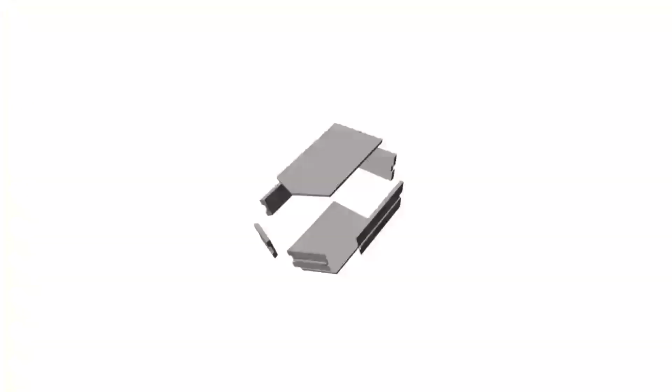When we link principles and theory to art and practice, that's when science becomes meaningful. What is so special about this project is that it's somehow in between arts, science, and engineering. So the question is, if glass is a material that is going to be constantly used in the field of design and architecture, do we know how to come up with better structures made out of glass, and how to take advantage of the structural capacity of the material itself?

We really want the glass to do everything, from the load bearing to the aesthetics to the construction techniques. Glass Bridge is a manifestation of a narrative that architecture could create elegant, efficient structures, although they might look daunting and impossible at first glance. These sorts of structures follow the rules of nature. When you look at the skeleton of animals, when you look at a tree, everywhere you can see these tension-compression systems that efficiently distribute the material where exactly it's needed.

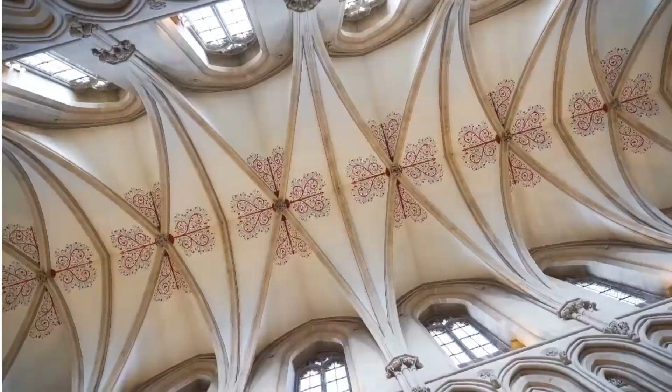We're doing actually what has been used by engineers and architects since medieval times, and probably earlier than that. What's unique about what we're doing, I think, is the material that we're using, but also the modular approach that really lends a degree of flexibility in your ability to construct.

We're used to thinking about glass as being a really fragile material, and one of the things that this project does is disrupt that narrative. Glass is the only transparent material with such durability that we use it everywhere, from facades to cars, to the screen we're talking through.

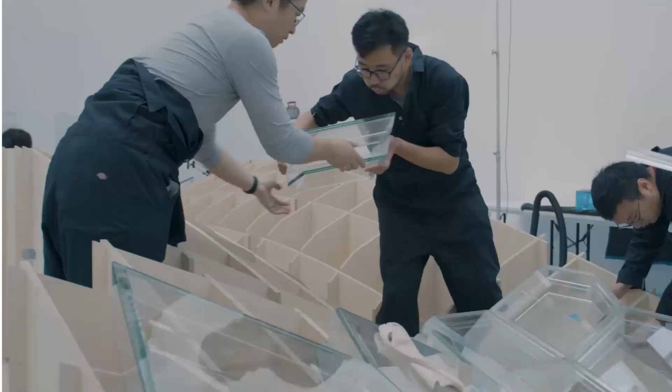We wanted to really push the construction methods related to glass. We wanted to show how you can be innovative with the use of material, how you can minimize the use of material without compromising the function. We also had intentions to create an elegant structure. We wanted to exercise all these techniques to show you can take advantage of existing technology in making pieces that are quite efficient.

The brilliance and success of this bridge is not only in its innovation, but in its beauty. This is just an example, a gate that opens all the opportunities for future architects and engineers who look at the conventional way of building structures and say, okay, as a second thought, we might approach this differently.

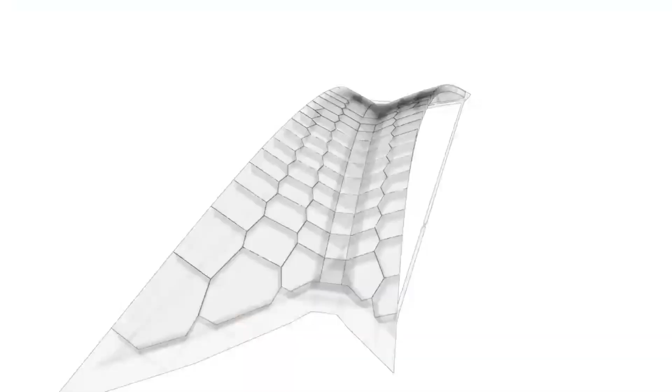My only hope is to open a door for future explorations, to look into innovative methods of construction that are more efficient, environmentally friendly, and reduce carbon footprint. We are trying to depict a better future for ourselves and also for the next generation to come.

If you don't know, this slide shows that the construction industry is responsible for almost 50% of annual carbon emissions. This includes embodied carbon and operational carbon. Embodied carbon is the amount of material, process, energy, and carbon that goes into the production of construction material together with the techniques we use to build buildings. This stays with every building we build throughout its life—you cannot change it.

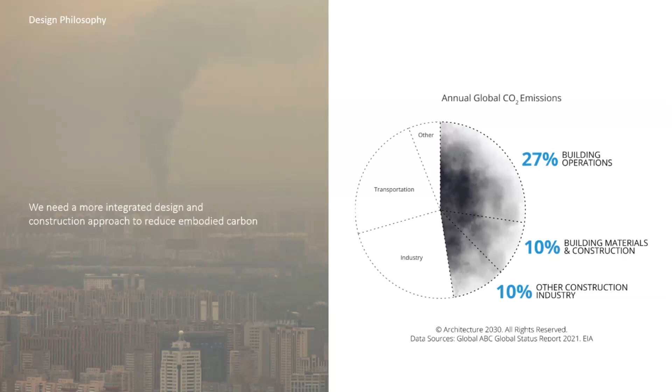Operational energy is another thing—you can invent new HVAC methods, improve or change that system. But one thing that stays with the building is the material and method of construction. So how can we reduce that footprint by looking into that method? Myself and my team, for the past 20 years, have been trying to come up with novel ways to help reduce construction material.

The inspiration obviously comes from nature. Many of you have seen this image before. Nature is a master at finding ways to redistribute material where it has to be, to create lightweight structures that function really well, through millions of years of evolution.

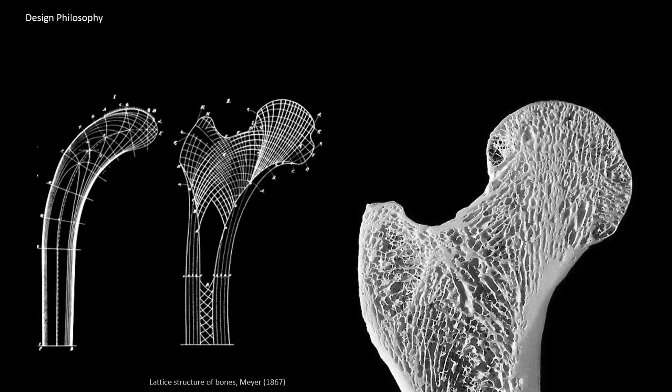Why is this so interesting? He said that if you hang a chain from two ends, it forms a spatial geometry. What's special about that geometry is that it's in pure tension—everywhere you cut a section through that chain, it's in pure tension. So there's no bending moment, no twist, anything. The material actually follows the direction of the force.

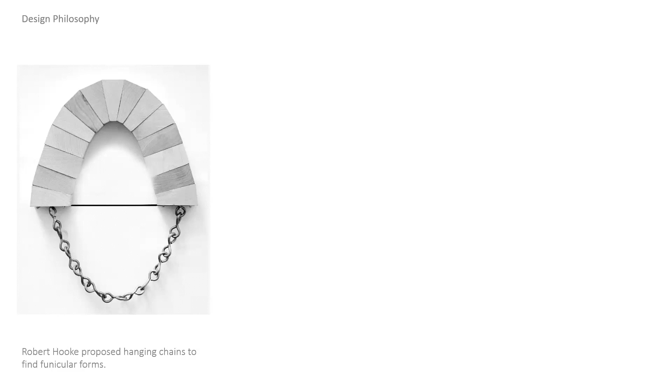More interestingly, if you reverse that form, it gives you pure compression. That's really interesting because at the time—for the past 100 years or so—people used to work with masonry material only, and that's the only force masonry can take. So they had to follow these rules. This became a design methodology historically.

200 years later, mathematicians looked at these forms we refer to as funicular or catenary forms. Funicular means the form carries forces in pure tension or pure compression. They realized you can geometrically describe these properties by creating a closed polygon around every node, and if you measure the length of each edge of that polygon, it tells you how much force goes into that node to keep the structure in equilibrium.

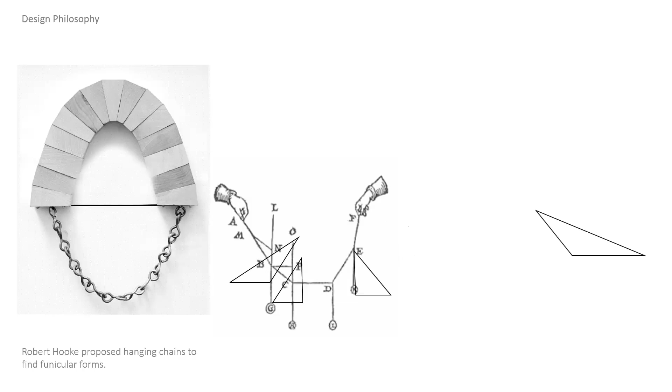This is super interesting because coming up with a form that is efficient and funicular is difficult. But we know you can design a force diagram that represents the equilibrium of that form, and from that force you can extract the form that is in either pure compression or pure tension. Everything is just pure geometry—you don't have to do any calculation, it's just pen and pencil.

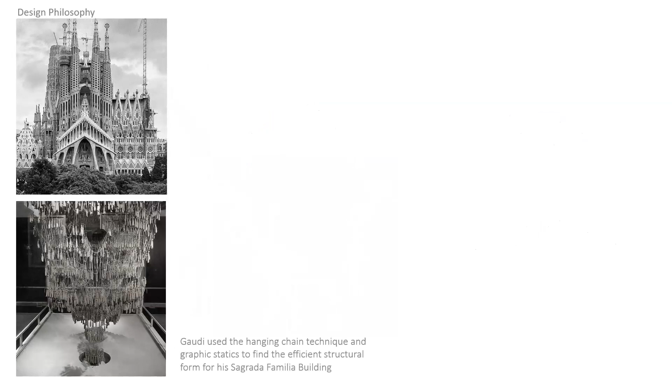So this method was used extensively in the past. If you're familiar with Antoni Gaudí, he used both hanging chain models for creating Sagrada Familia and graphic statics, which is the basis of this geometry-based method that I described.

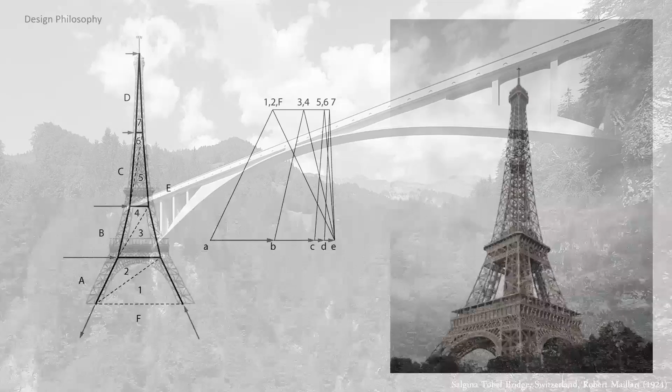Furthermore, the examples of great Swiss bridge engineers, Robert Maillart. He used graphic statics, a geometry-based structural design method, to build his structures. And for your information, the Eiffel Tower has been designed using the same methodology.

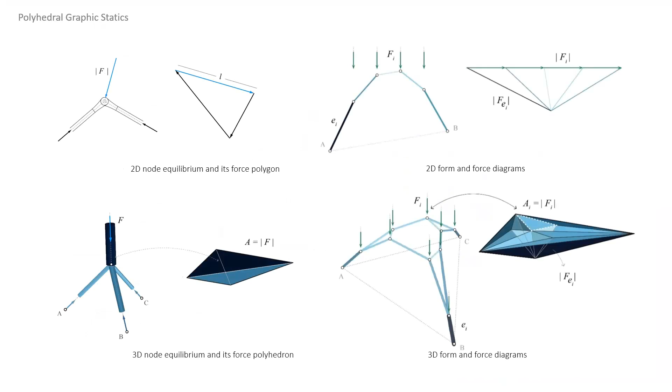In 2016, I was lucky to be among the people to extend this method after 150 years from 2-dimension to 3-dimension, where the equilibrium of forces could be represented by a closed polyhedron instead of a closed polygon. You measure the areas of the faces of those polyhedrons, and that tells you how much force goes into them. More importantly, you can design your force diagram as an aggregation of these solids together that describes the force equilibrium, and extract a variety of different spatial structural forms that are efficient, either in tension or compression. We've tested this with many examples in my lab.

For instance, this sample is only 24 pounds, and it can take the load of 4 elephants, 55,000 pounds. Or we design structures that are pure compression in the body, and the relative density is actually very close to the relative density of a human bone, the mass that is distributed in the space.

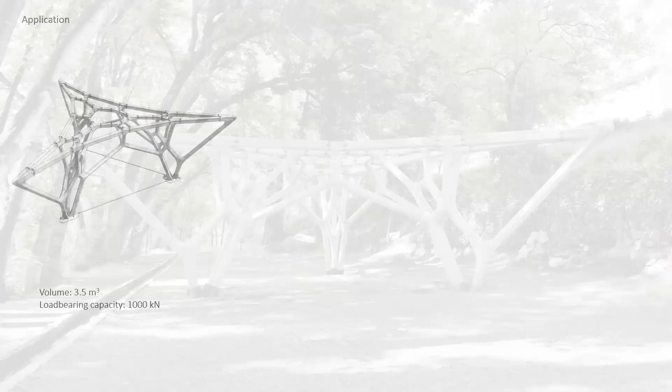We have applied this to a variety of different structures. For instance, this structure can take 10 times more load than a conventional post and beam with the same amount of material. And you can apply this to the design of floor systems, and you can reduce the material, for instance, from 30% to 50%. All good, great, but why glass?

All right, so quickly, why glass? We claim that we have a methodology that can design efficient structures. We can reduce the amount of material, we can reduce footprints.

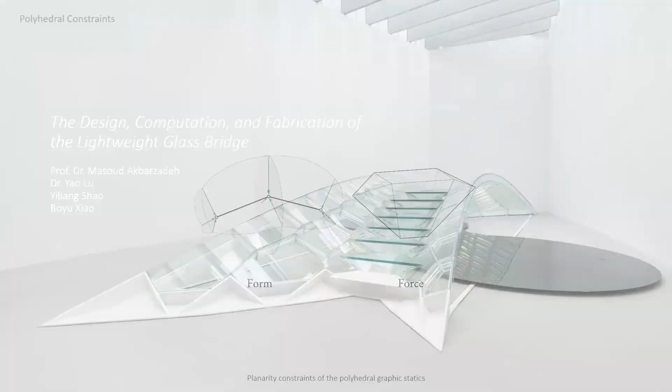Why glass? We all know that glass is actually one of the most important materials to work with, from the phone in your pocket to the envelope of buildings. And many designers and architects would start to use glass more because of its elegance. So the question was, if we claim that we can design efficient structures, can we design structures that are efficient out of the most brittle and challenging material to work with, which is glass?

For that reason, we picked that battle to say, okay, let's just design a super efficient, lightweight structure out of glass. There's another point for that.

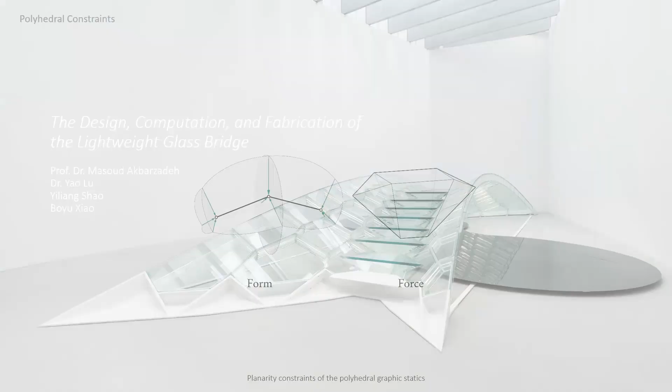The forms that I showed you have an inherent limitation. These polyhedral geometries all consist of planar faces. So on one hand, they're efficient, on the other hand, they're limiting. But this is not a limit in the field of architecture because we work with material. We have to materialize the forms that we create. So if they consist of planar faces, that means that they're best at translating sheet-based material into constructing efficient systems.

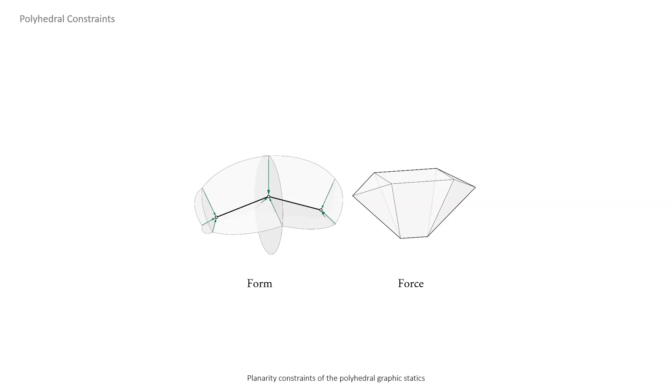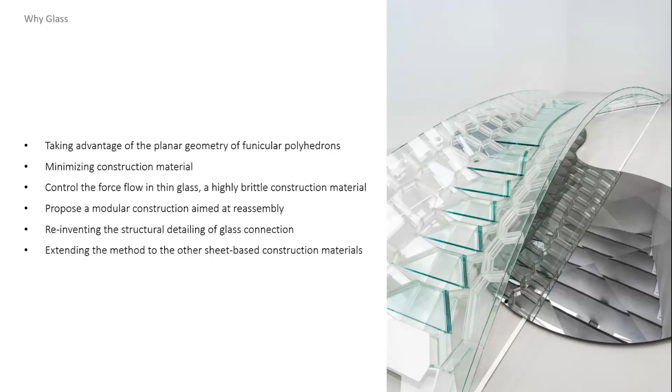So glass makes sense in this sense, because if we can build this out of glass, you can do this out of any other sheet-based material, like steel, aluminum, metal, concrete, etc. There is another design aspect to it.

Because we are using graphical methods, and we have full control over the geometry, we can redistribute the force in multiple load paths to get a multi-layer compression-dominant structure. This is very similar to the structure of, for instance, the backbone of a turtle.

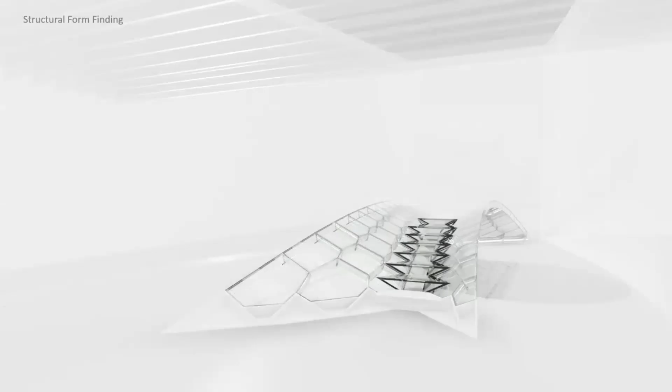Now, I'm going to tell you another thing that relates the structural form to the construction module of the bridge. So this is the bridge itself. You see that the module is a polyhedral form. It consists of 124 cells, polyhedral cells, that we take advantage of for construction later.

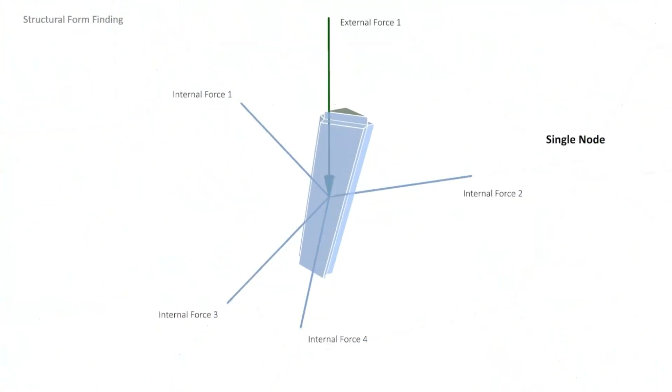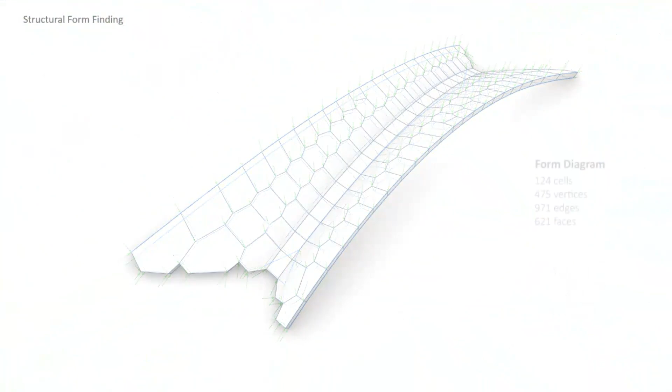If you look closely at that structural form that we designed using the methods of polyhedral graphic statics, you can see that the equilibrium of each node is represented by a closed polyhedron. These put together create a diagram that we call the force distribution diagram, from which this actual geometry of the bridge is extracted. Now, if you move further, we wanted to again take advantage of this geometry.

So we started to design the cells. Each unit is, in fact, one geometric polyhedron that consists of glass panels on the top and bottom, and the side face is made out of acrylic. The reason for acrylic is that it's cheaper at the moment. We didn't have that much time budget to go with glass, but in the future, obviously, we can do that.

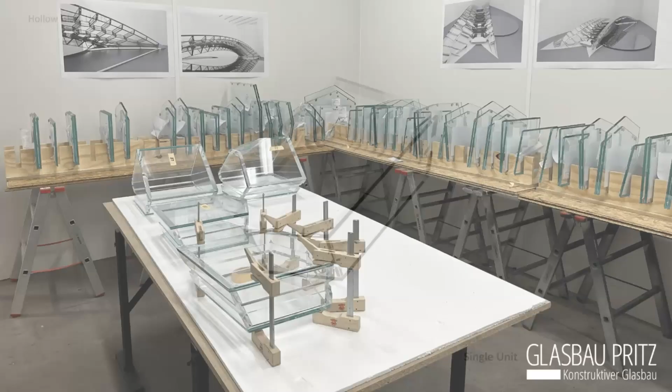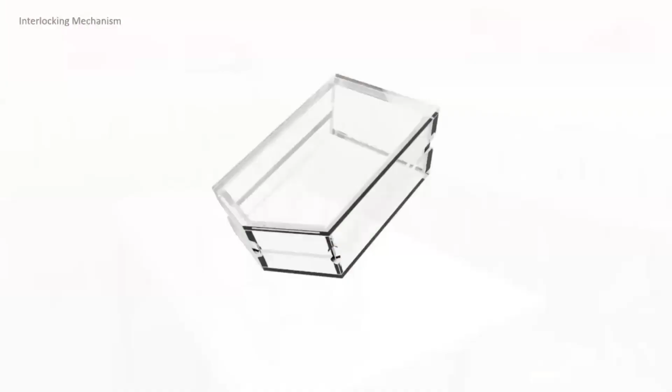So this is a scene where the glass units were produced in Germany, and we were lucky because Moritz from Glasbau Pritz is here tonight, so he can talk a little bit more into details. But we gave instructions to them on how to put it together because we did multiple studies on that, and then they translated it into precise construction.

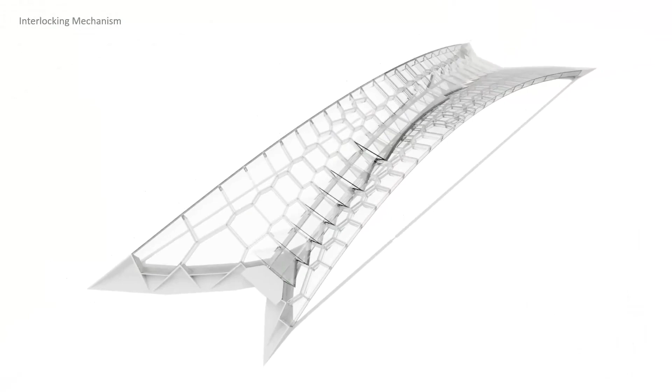Once you make this light-weighted structure, the most important thing is how you deal with asymmetric loading scenarios, because your structure is light and that might cause dislocations or displacement in the units. So we came up with an interesting mechanical detail that allows us to lock the units with each other. It's a dovetailing connection we refer to as a butterfly connection.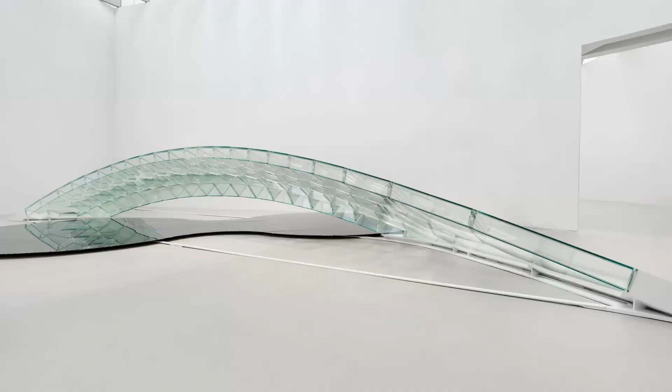That is the connection that held everything in place after we position the units. Everything is mechanical, so you can actually take that apart and disassemble it. If needed, you can replace the parts, and the goal is to disassemble it and assemble it in another place.

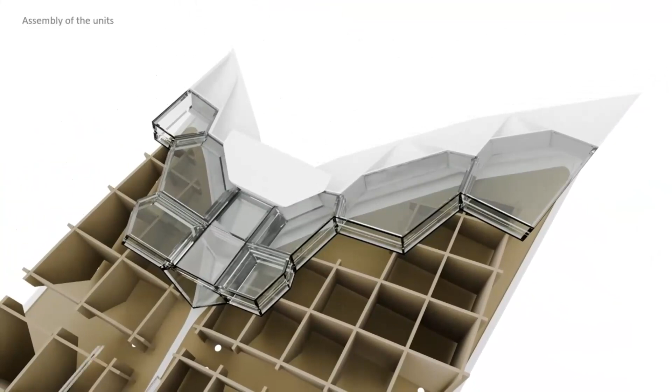The construction process started similar to many other structural systems. We start with the formwork, which is wooden, and then we place the units one after another. There is a particular sequence of assembly, because these butterfly connections could only be inserted in certain locations, so you cannot lock yourself in. There was a process.

We could not interlock all the units together because of the difficulty of assembly. In the places where we could not insert a butterfly connection, we used a square section rod for better engagement of the units.

The design of the bridge had rotational symmetry. These 124 units are in fact 62 identical units, and we basically start the construction from both ends, and they meet at the mid-span of the bridge. Then we have this keystone to place and connect the two ends together.

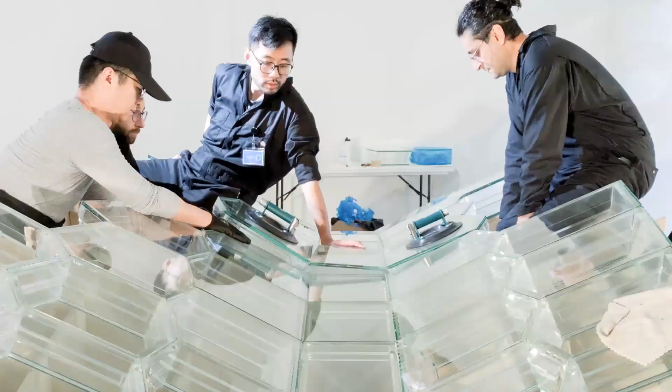It was not an easy task to assemble, because we had to make sure everything was precise, and the construction tolerance is only plus minus 0.1 millimeter. So we had to be very precise, and that was a little bit challenging. And this is the end piece.

What I showed and discussed was an overview of the reasoning and design philosophy behind it. But it took us around 5 years to get to this point where we could build this and exhibit it and talk about it. What I'm going to talk next, and invite my collaborators to the scene for, is to give you a little background on how we got there, because I did not talk about all the experimental studies we did to understand the material behavior, unit behavior, and structure behavior, or the material studies and numerical analysis needed to get to this point.

With this, I'll invite Dr. Joseph Yost to join me on the scene, and he can expand on the experimental work that he conducted, which allows us to rely on glass as a structural material. Thank you.

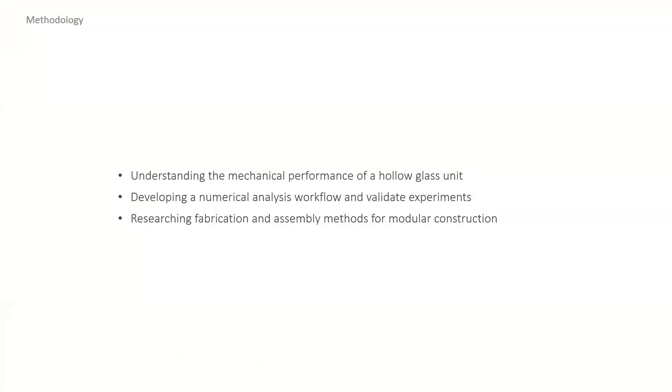My contribution to this evening is to show some of the background work that has taken place in the laboratory to justify the use of the material, which is glass, in the compression dominant form that we're using through the polyhedral graphic statics. Super important here is using the modular construction, okay? That's a very unique aspect of this project.

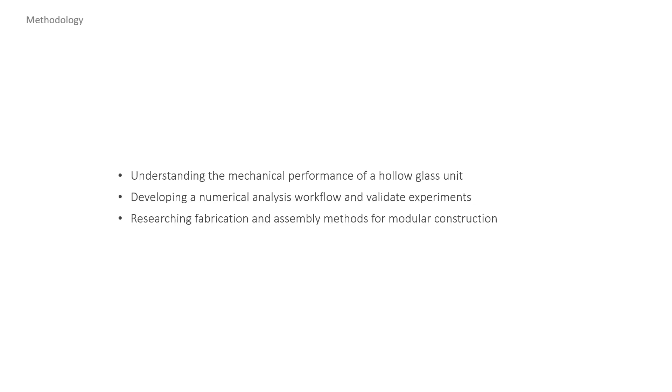I'm just going to look at a couple of pictures here, and those pictures are correlated strongly to the bridge that we have here at the Corning Museum and its ability to function efficiently as a structural system.

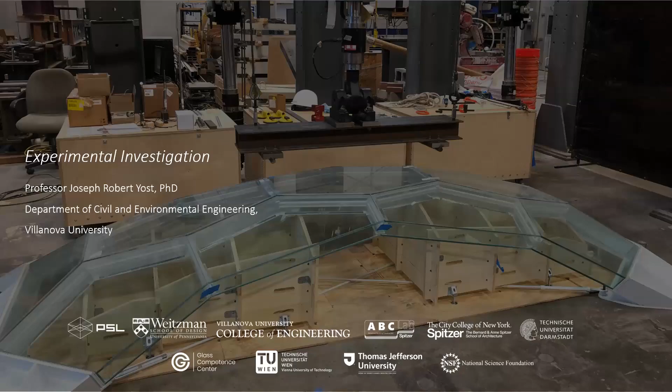I'm going to start off with the fundamental unit here, and that is the HGU, the hollow glass unit. Once we conceived of this as our building block, the first question we had to answer was, how strong is the building block? The system is only going to be as strong as its individual parts.

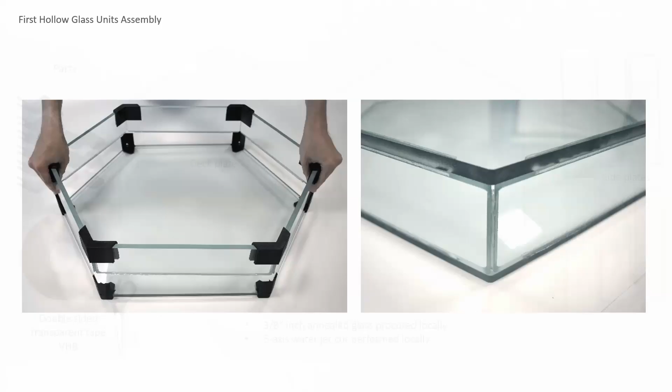So we built our first HGU in the structures lab at Villanova University, and this is from the fall of 2018. It's really amazing to look at this picture. We had the float glass cut by a local fabricator. We assembled this in our structures lab using 3D printed guidance, a two-sided VHB tape, and we put the thing together in the lab, and we were really on the learning curve here. But the end result of what we created, just aesthetically, we were super excited about this thing, and thought, I think we're really onto something here.

If we can really develop this as a modular structural system, I think we're going to have a very, very unique form of construction.

All right, so we built the hollow glass unit. We needed to answer the question: how strong is an individual hollow glass unit? And again, vocabulary is important here. We're talking about compression dominant structures.

So we built 4 of these things eventually, and we brought them to the structures lab at Villanova University, and we loaded them in compression, which sounds easy, but to get something loaded in pure compression is actually very challenging because you don't want to have any eccentricities in your loads. But nonetheless, here's a picture of our hollow glass unit in our testing apparatus.

It was loaded with displacement and strain sensors so we could pick up the behavior of the structure as we loaded it to failure. So here is another detail of our test setup. Here is our hollow glass unit under test, and in the bottom left-hand corner there is a digital display that shows how much force in thousands of pounds is being applied to the structure.

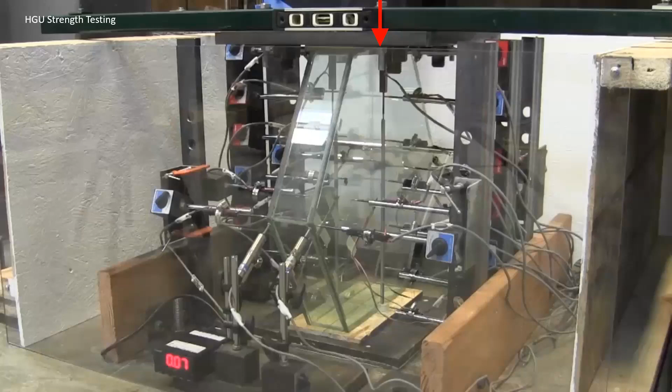And if I cross my fingers and hit the good button, we should see a video here. And you can see that go up. It's going to stall at about 37,000. And then it's going to explode.

So this super exceeded our expectations. Jens and Damon and Masoud and I figured we'll probably get to 5,000 or 6,000 pounds. And we got up to 37,000 pounds. And we had one actually that got up to 42,000 pounds.

So we were also very confident that not only is the system going to work, but it's going to have more than enough capacity to serve our demands. And this is just a simple picture. We could get into how it failed. It was flexural buckling, exactly what we wanted.

All right, so the second test—we're doing modular construction, remember. So that means this piece is acting with this piece to form a system. Well, when you have glass and you have 2 pieces of glass in contact with each other, that's a recipe for disaster. You have a brittle material in contact with a brittle material; you're never going to develop the capacity of the material, which we just saw is 37,000 pounds, just to put a line in the sand. You're never going to get there if you can't transfer the force within the system or between glass and glass.

So we needed a transparent interface material that could smooth out the stress concentrations that are going to occur where the glass is bearing against glass. This is a little more mundane. There's no exciting videos to look at, but it was a super important behind-the-scenes experimental system that gave us the results that we needed.

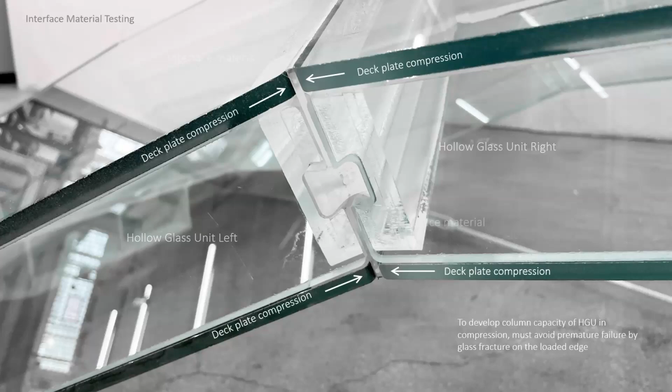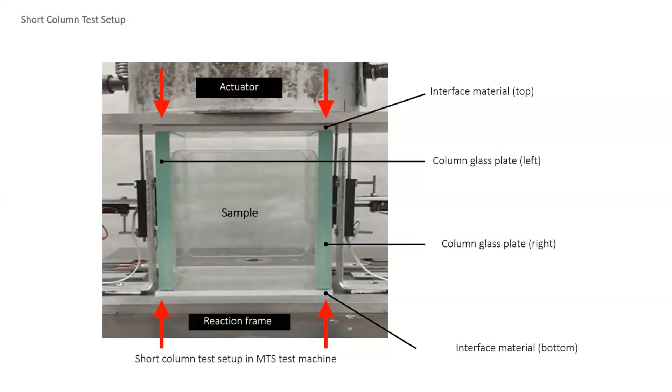We tested many different materials. A number of them did not get us the force transmission that we needed, but ultimately we came up with a material that did. This is the test setup. We spent over a year testing probably about 4 or 5 dozen of these things under different loading scenarios associated with cyclic and creep loading.

And the bottom line is a fancy graph here. There's a horizontal red line—that's the line in the sand that we wanted to get. And all of our colored bars or charts there exceed that. So we knew we had a material that would allow us to develop the capacity of our hollow glass unit.

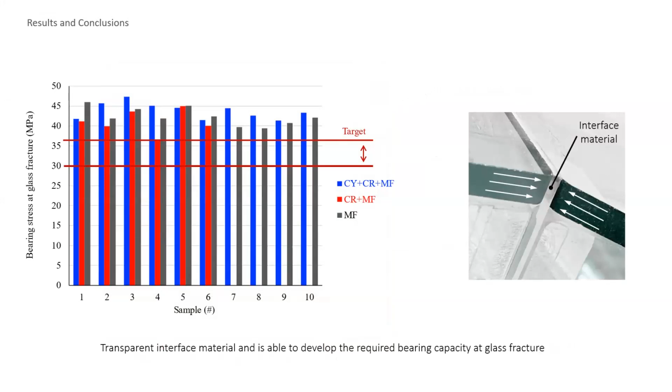All right. Before we got to the 10-meter version of our glass bridge, we needed to experiment with a prototype system. So Yao Lu, who was Masoud's PhD student at the time, built these hollow glass units at a company called Eventscape in New York City and built a 13-cell prototype glass bridge. And we named it—or Masoud named it—Tortuga, which I think is very appropriate, tortoise in Spanish.

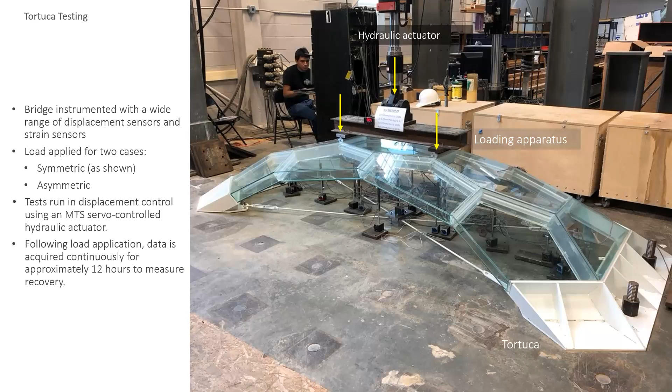And we took Tortuca, we reconstructed it in the Villanova Structures Lab, and we tested it. And it's beautiful to look at these pictures because I spent a lot of time on the ground underneath that bridge, installing displacement sensors and soldering wires and just getting everything right so that when we did test this thing, we're getting meaningful data that objectively tells us how the system functions.

So just a couple of pictures here. I drilled those bolt holes right there. I drilled and put those low displacement units together. I like to get my hands dirty.

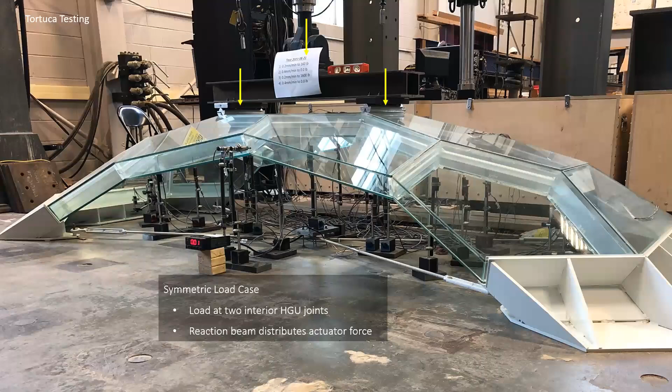And then we tested Tortuca, and we got wonderful results. We tested it to what we refer to as the serviceability limit state in engineering terms, which means: we design our structures to resist certain loads, service loads, and we design them to exceed that, but there's a service limit state, and this is what we expect the structure to see.

So that's a little walk down the path of experimental work that has led us to the 10-meter bridge that is here now at Corning. But there was a lot of stuff that happened in the lab, and it was a learning experience throughout all of these experimental programs. Each time it was an enormous sense of satisfaction that what we're proposing to do here, the way we're proposing to do it, i.e. the modular construction and the use of the material being glass, were consistently reinforced by the experimental work that we have done in the lab.

Just to throw this out there, we have a number of publications in peer-reviewed journals and conference proceedings, and Masoud may even have a slide at the end here. So if anybody's interested in learning about all this, our work is readily available through extensive technical publications. So it's been a pleasure to be here, and thank you.

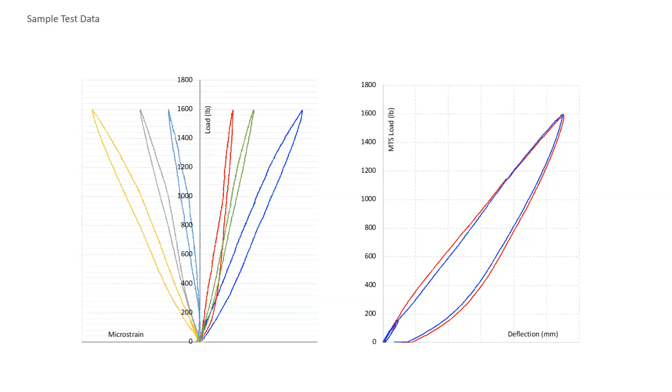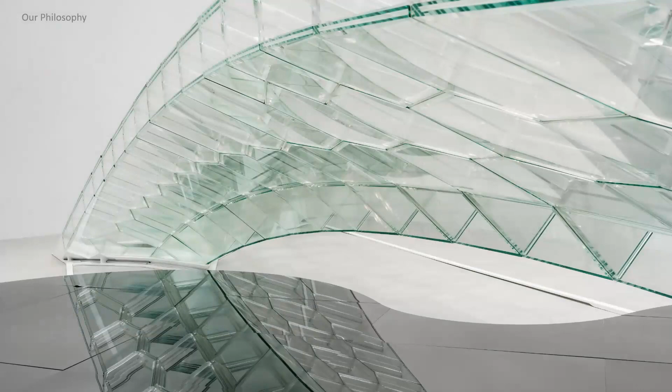When art and physics come together, architecture is born. In a way, art is the soul, and laws of physics are the backbone and skeleton of architecture. So in the next couple of slides, I will be talking about how we use these laws of physics in form of structural engineering and mechanics to rationalize the concept of the glass bridge.

From the very beginning, we had a lot of questions that needed to be answered. Questions like, we have the concept, but what thickness of glass would be appropriate for this project? What is the depth of this glass bridge that is going to work and be functional? What sorts of mechanics and connections are we going to introduce, and how is the mechanics going to work from one HGU to the next one? What is the support situation? What sorts of thickness do we need?

So these are very important questions that we had no clue about at the beginning of the project, but we needed an answer in order to build this. And after answering those questions, there were more questions.

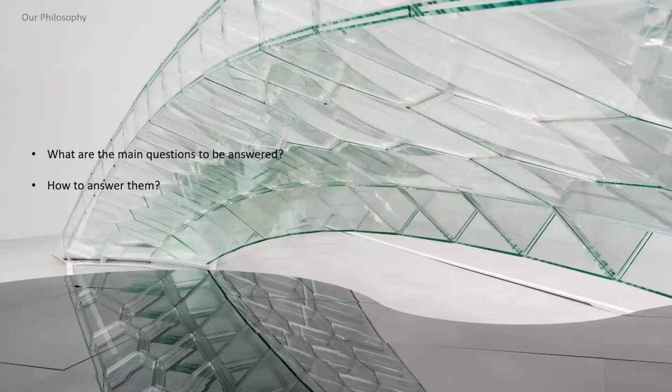Okay, if we know this glass with this thickness, with this depth of the glass bridge, how is the final product going to behave? What would be the deflection? What would be the behavior of this glass under its own self-weight, or what if someone's going to cross it? Like we have a load, then how is the bridge going to behave? So these are valid, important questions that we have to answer in order to have a safe structure at the end of the day.

Okay, so in order to answer those questions, we needed a working model, because at the time we didn't know even if we were going to do any tests. So we needed a working model that could accurately predict all these questions. And in order to do so, we, as designers and engineers, had two options.

The first option was modeling the bridge using what we call micro modeling, micro detail modeling—that is, considering every single detail that you see in the glass bridge, all those surfaces and connections that Masoud and Joseph were talking about. We need to model that accurately and then see how the structure is going to behave. The second option we had, we call macro modeling, which is more rough in terms of modeling with a lot of simplification. Each model had its own advantages and disadvantages.

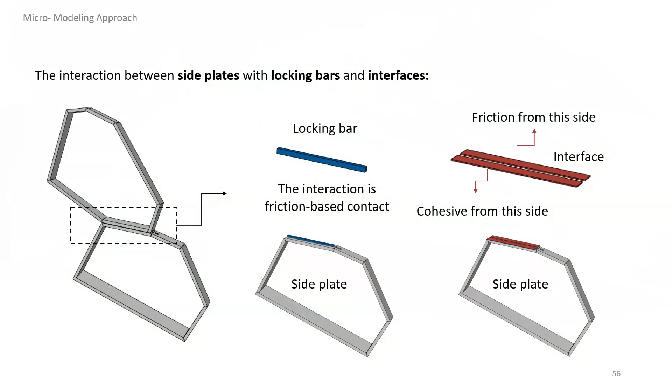I'm just going to show you some of the technical difficulties and problems that we encountered during the modeling of the bridge. For instance, the interaction between side plates, locking bars, interfaces. If you want to do a very detailed micro modeling, you have to consider every single thing in the bridge—there are hundreds of pieces, thousands of interactions, and these are just some of them. We have friction, cohesive behavior, elastic material, plastic material, and thousands of them. In this case, each unit you see has these glues or VHBs, each unit on average has 20 of them, and each has 2 interactions.

Adding those numbers, you get a model that's going to take literally forever to run with the infrastructure we had. We could have done this, but you're not going to get an answer in a timely manner, meaning it needs months to run. And knowing we have hundreds or thousands of models to run, like changing the thickness, running, getting the answer, this was kind of impossible to do.

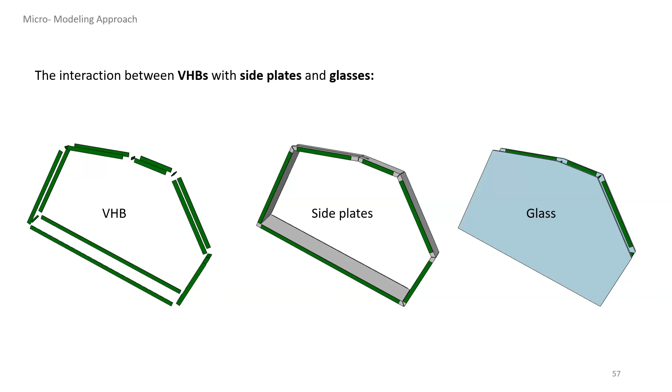So the second model we considered was the macro model, meaning we simplified things. Some say it's oversimplifying, where we have just a glass shell as a continuum and the side plates as another continuum, everything connected, with no signs of the interlocking bar. We consider those parameters within the model somehow, but this model was very simplified, and in some cases we might lose accuracy.

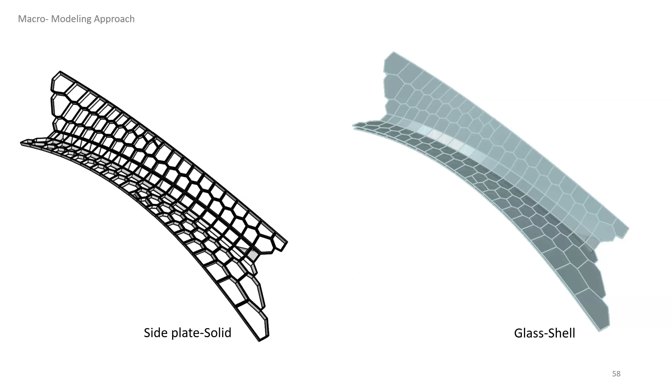So through the process of the project, we realized we need a middle ground. We came up with something we call the simplified detailed model, something that could predict the behavior of the bridge accurately, but at the same time not be expensive in terms of running time. By using engineering terms instead of very technical forms, simplifying it, it could predict the behavior of the glass. This is our simplified model that shows we could reduce the number of interactions and materials and still get the answer.

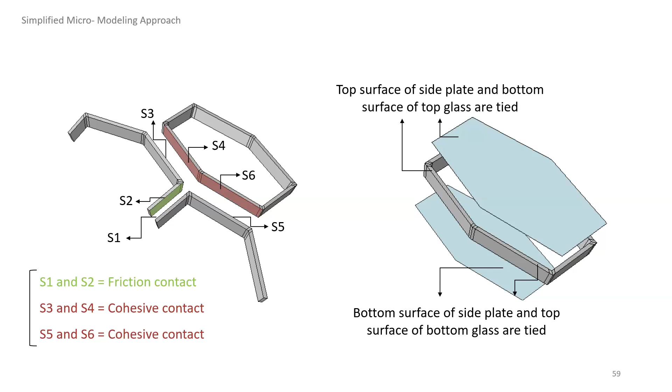But the question was, how do we know this simplified or detailed model is going to work? Thankfully, we had the test from Joseph. We had all this information, and we had the model actually before doing the test, so we had some prediction of how the test was going to behave. The simplified micro model or detailed model was a good match — the experimental and numerical results were in agreement.

So we said, oh good, our model is predicting such a complex case — and this is one of the most complicated problems I've ever had, and believe me, I've dealt with a lot of complicated problems. There's interaction, material, a lot of things going on.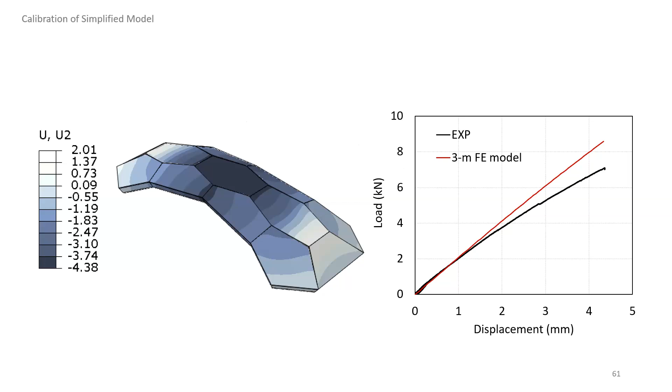Now, the 10-meter bridge, we're not going to test it, but we have a working model, so we could extend what we have to a different model, if we wanted to change the geometry. Now we have some sort of faith in the model before even getting the green light to go ahead and build it, because we need numbers.

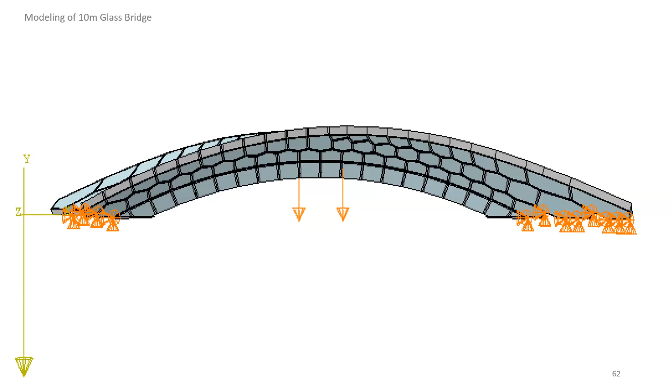We used this very same model to build the 10-meter bridge with all the details we had. This shows how the connections, supports, and loading behave under its own self-weight, and also under a critical loading condition, to see at what load this bridge is finally going to break. This is a video of our model.

So if you wonder how this 10-meter bridge is going to behave, this is how it's going to behave. This is the worst case scenario, meaning right in the middle of the bridge we push it down, just like what Joseph did at Villanova University — that's the worst type of loading, a concentrated load pushing it down. Of course, it's just going to bend and collapse.

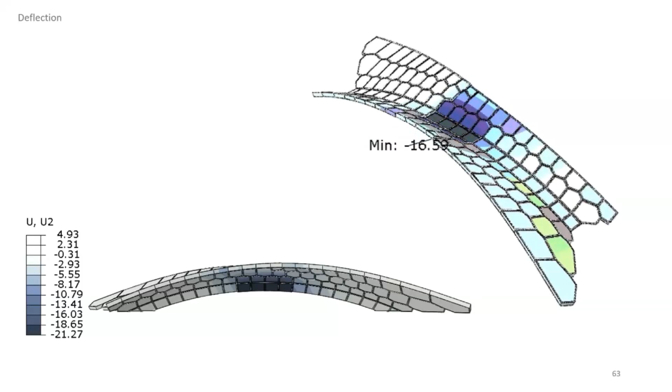But we did that, and we looked at the numbers, and realized there are numbers from code saying how much load we should apply — a single digit number, 4 kilonewtons per square meter. If you apply that and the structure stays within the boundary condition of what you define as a safety limit, then you're good to go, you could build that. For instance, the maximum deformation the code allows for such a bridge is like 5 or 6 millimeters, and if you're less than that, you'll be fine.

So eventually, summarizing everything in one slide, looking at the stresses, we realize the glass is not going to explode because the stresses are always less than the strength of the glass. That's the safety margin we see — it's 44 megapascal, and the glass is going to carry more than that.

And also in terms of this chart, we know that the bridge under its own weight and load is going to deflect around 2 millimeters, which is within the allowable condition. So we know if you build this bridge with all the details that we have, the bridge is going to withstand not only its own weight, even if you apply the load, it's going to be okay. And that's the moment that we were happy and said, okay, let's go and build this thing.

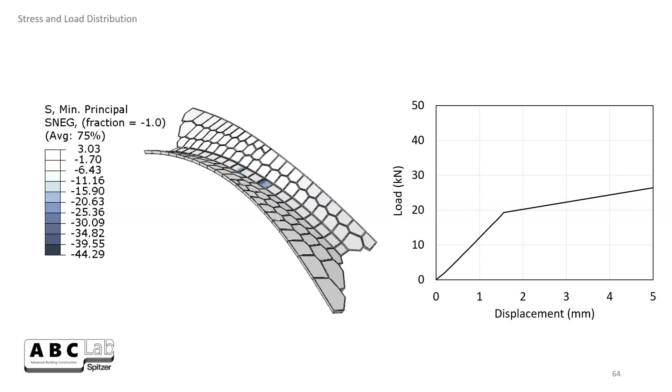Again, we did a lot of experimentation. Every single experiment that we have done, we did the model, and we make sure that the model is actually working. With that, I will introduce Professor Jens Schneider, who is not here, but I'm assuming he will be joining through Zoom. Professor Schneider is going to talk about the impact of this project.

Thank you, Damon, and good evening from Vienna in Austria. Thank you for having me this evening. I just want to talk a little bit about our brilliant collaboration between architects and engineers, because I think the impact that we can have from that was already mentioned by Masoud a little bit, but I want to talk a little bit more about it. Masoud, could you have the next slide, please?

So if we're talking about glass material, I've been working with glass since I was in school, and already in school time I was working in window replacement. And this material, of course, comes with its transparency at a cost. The cost is the brittleness, and the brittleness means we always have to work across different dimensions and different scales, because many of you in the room will know that micro cracks and nano cracks in the end determine the strength of the material, and it is very difficult to exploit its full potential in tension because of these micro cracks, nano cracks that we cannot avoid during production.

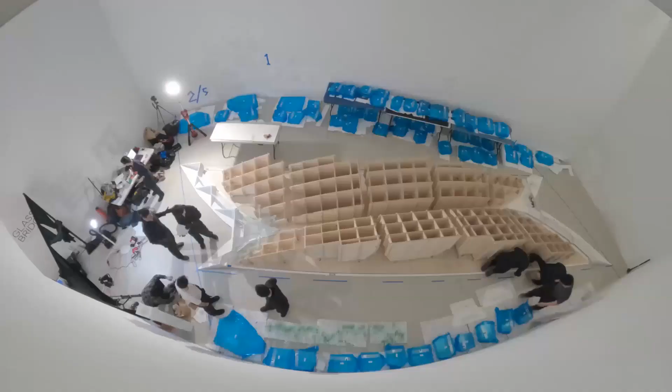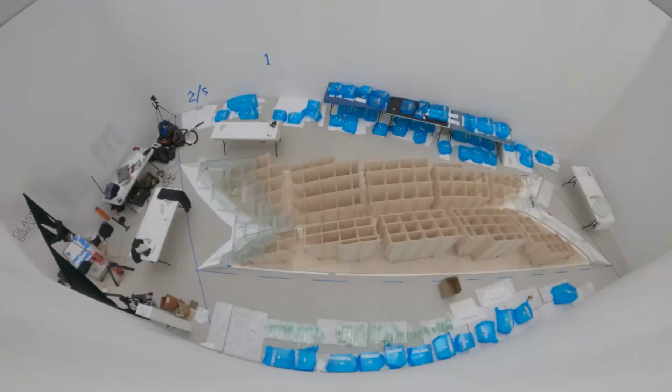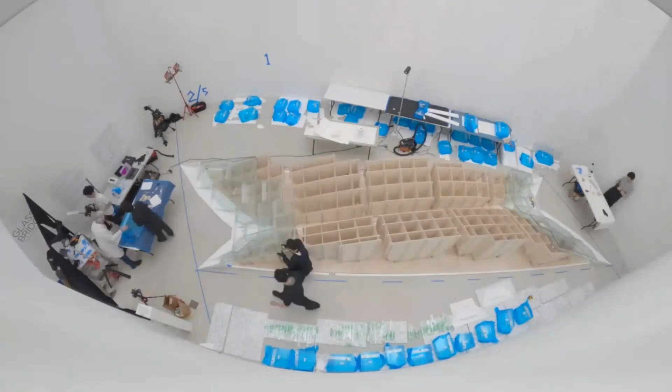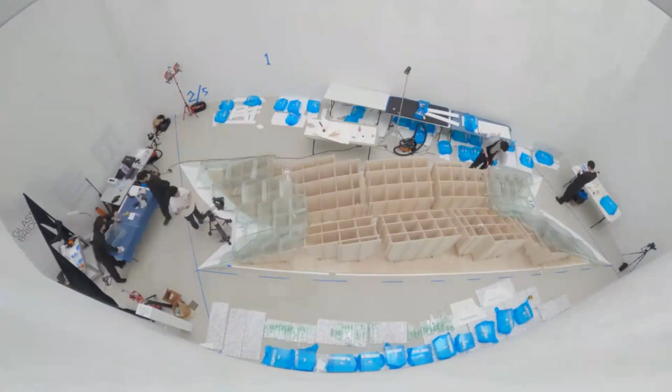And I think the last aspect I just want to talk about is the assembly-disassembly. I think in the future, more and more the engineers will have to deal with the fact that we need a real circular economy. Circular economy means that we want to reuse as much as possible, but this means that already during the planning and design of the construction, we have to think how to disassemble, also in case of reuse later. And of course, this project, like hand manufactured now here, shows a large potential also for future improvement, for example with robots helping humans put the plates together and making it even more efficient. But I think the principal idea of assembly and disassembly is very well kept in the idea that these hollow glass units can be manufactured one by one and then later put together like in a big puzzle or brickwork.

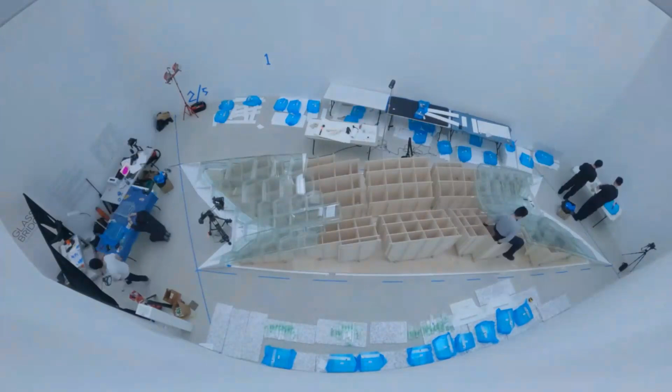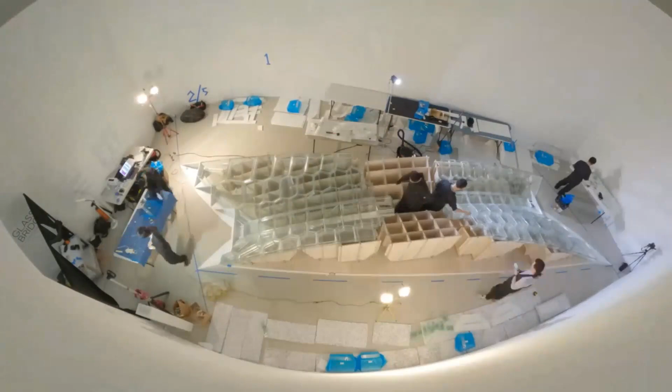So I think in total, the impact of this project will be a different mindset, because human imagination is unlimited and is really needed with the pressing challenges we have in our environment. We have to keep working on using our imagination in a way that motivates other people to follow these material efficient, energy efficient, and CO2 efficient structures that help the building sector reduce its impact on the planet. This is why I'm really proud to be part of this project. Thank you.

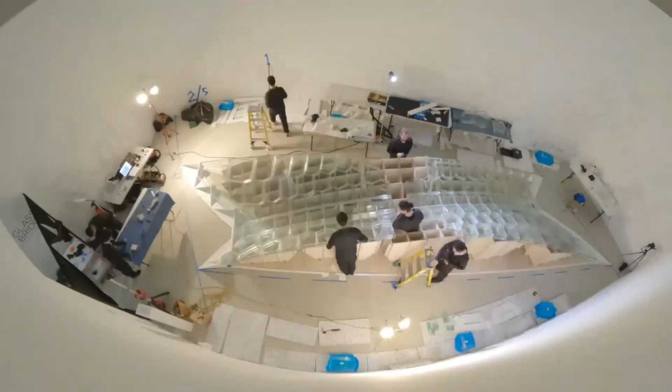Thank you very much, Jens. I wanted to say a few words about the artwork designed underneath the bridge. It's a design collaboration with Swiss-French artist Romain Grelier, who we had the honor to have here today. We had a really good collaboration with Romain because he has extensive experience creating reflective surfaces. I reached out to him because at the time I was looking for a design element within the exhibition space that could emphasize the role of the bridge. Obviously there was no river or chasm we were bridging over, but we wanted to emphasize that this project is bridging over something.

Just to reflect the beauty of the bridge, the underneath geometry of the bridge. So we had a conversation with Romain, and he actually executed really interesting pieces, if you look at his portfolio, made out of recycled oil as a reflective surface. That was an excellent choice for us, because we were advocates for a bridge to the future, promoting advanced technology and reduction of carbon footprint. So it was the best segue to have a fossil fuel underneath that, to say: look, you're bridging over the fossil fuel to reduce carbon footprint.

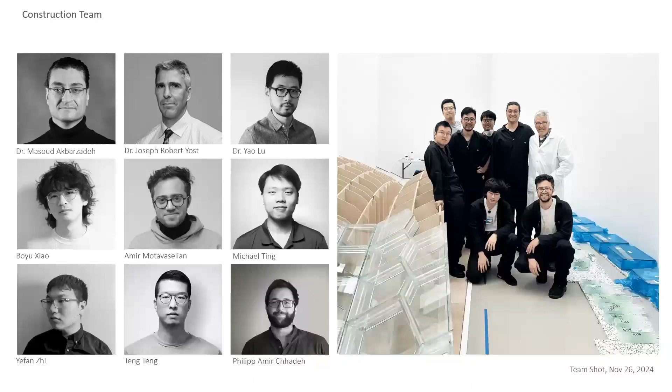Fast forward to the team involved in the construction, many of whom weren't able to be here. I thank them all, my team members, and also my former PhD students, Yao Lu and Joseph. We had the privilege of working with him at the time of installation, and people who traveled from Germany, Amir, Jens, and students, to be here. We had a really nice time, and thank you to the Corning team and Kate for hosting us and letting us work on this project.

As Joseph said, we have extensive publications on this work. You can find these publications on the Polyhedral Structures Lab website, available for you to download. And if you're interested in the methodology I introduced in the beginning, everything has been collected in a book that I'm publishing simultaneous to this exhibition by Cambridge University Press, supported by the National Science Foundation. In fact, that was one of the reasons we reached out to Corning, to showcase and make this science and engineering work accessible to the public and communicate with the public.

Again, another thanks to all the parties and companies involved with the construction. This is one of those moments where, like at a wedding ceremony, you thank everyone but forget your mother-in-law, and then sit down. So thank you very much to the Corning team first of all. I had the privilege of talking with Susie Silva initially when she was here, and she was very much interested in the project. Then it carried over to Catherine, and then to Kate. We had really good support from Corning that made it possible for us to be here talking about this project. Thank you.